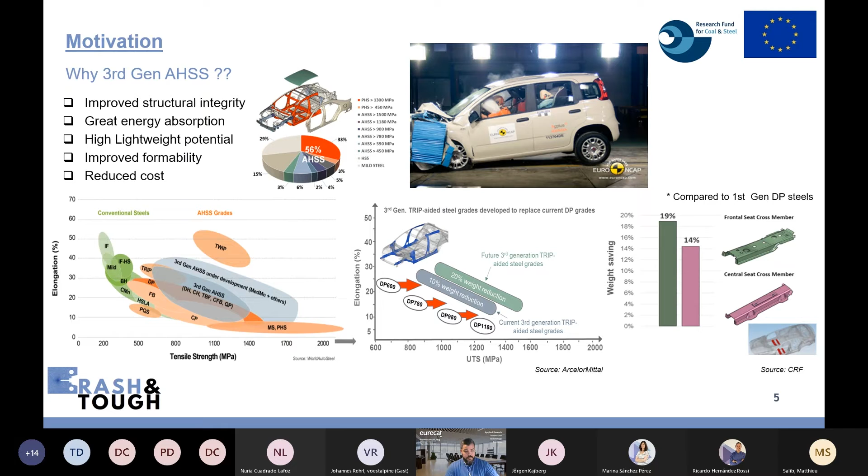Some similar information from another source - this is data provided by CRF, which they shared with us for the project. Again replacing first generation dual phase steels with third generation TRIP-assisted steels in different components, they obtain weight savings from 14 to 19%, which again are important savings, while maintaining or even improving the safety performance of these components.

Let's see what are the objectives of the project and also the main outcome. The main aim of this Crash&Tough project is to develop high crash resistant steel solutions based on third generation advanced high strength steels. We do this mainly through the investigation of the effect of microstructural constituents on crack initiation and propagation resistance, in order to optimize their microstructure for high fracture and high crash performance.

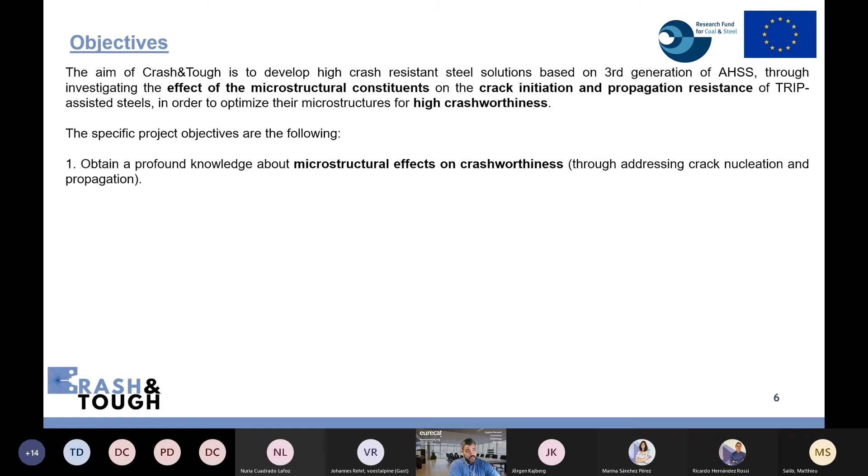The specific project objectives are listed as follows. The first is to obtain a profound knowledge about the microstructural effects on fracture resistance and crashworthiness. Second is to characterize the crash behavior of different trip-assisted steel microstructures by means of small-scale laboratory tests, including V-bending tests according to VDA 238-100, also fracture toughness measurements, and larger scale semi-industrial impact resistant tests based on axial and bending impact tests.

Also, an important part of this project is the development of improved finite element models to better predict the crash behavior. This includes the development of new damage models and new failure criteria based on strain and energy-based damage models that will be implemented to improve the accuracy of these crash simulations. Finally, we also try to validate the implementation of these new steel grades in industry, in high crashworthiness automotive parts.

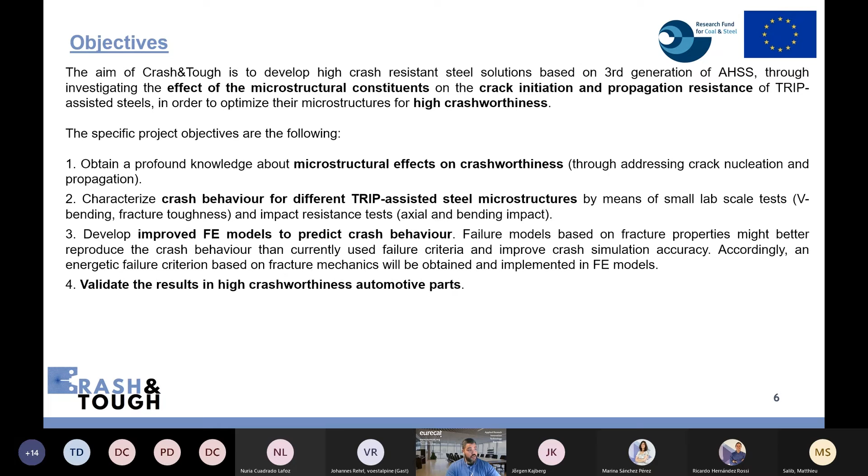Regarding the results, the main outcome of the project has ended with greater knowledge on the relation between microstructure and fracture resistance of third generation advanced high strength steels, together with new finite element models for crash simulation, which we will see later in the next presentations. We expect these achievements will also contribute to foster the development of new third generation steels or trip-assisted steel microstructures, and also the implementation of these kinds of steels in high performance and safety related automotive components.

Finally, briefly to talk about the project structure, the project has been structured into 7 different work packages, each one coordinated by one of the participants. Work package 1 was directed to the microstructural and mechanical characterization.

In work package 2, we performed a series of small-scale tests to estimate the crashworthiness of the investigated steel grades, namely bending tests and fracture toughness measurements by means of the essential work of fracture methodology. Then in work package 3, we performed more semi-industrial laboratory axial and bending impact resistant tests, also together with dynamic tensile tests at different strain rates, to characterize the dynamic response of these steel grades.

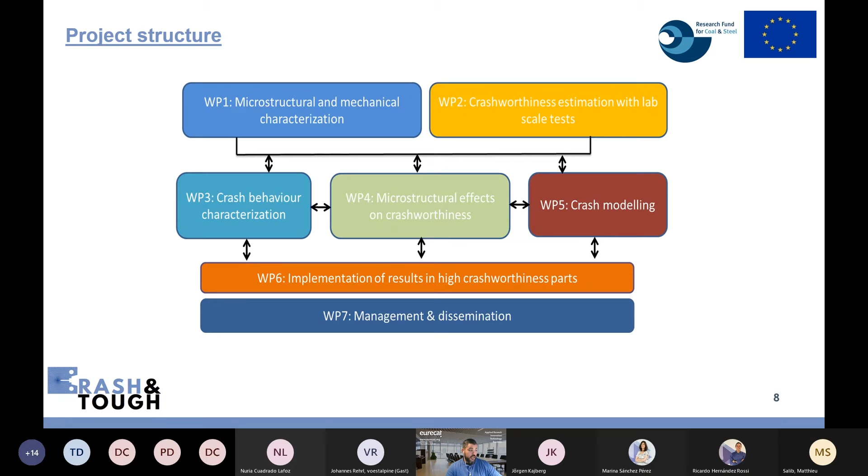In work package 5, we worked with new damage models to improve the accuracy of the simulations, developing new damage models based on strain and energy-based damage models that we will see more in detail later. All this converged in work package 6, where we implemented the results in industrial automotive parts. Work package 7 is related to management and coordination, which was led by Eurecat. I think that's everything from my side.

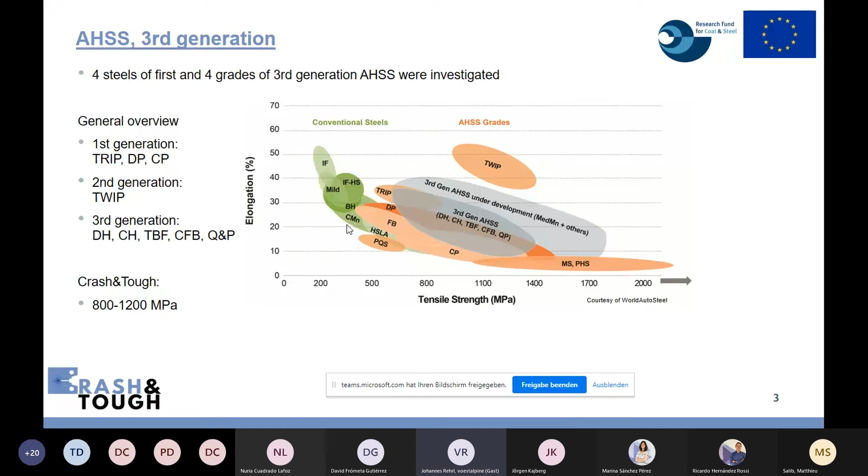Generally, we can say that the AHSS steels of the first generation show quite high strength and a balanced ductility. Typical phases in this multi-phase microstructure are soft phases like ferrite, bainite, but also harder phases, that means martensite, tempered martensite, and some retained austenite.

The grades in the third generation AHSS are multi-phase grades with an increase in global and local formability. That means these grades show high elongation values, good bending values, and improved edge cracking behavior. The grades contain retained austenite in a bainitic or martensitic matrix, including other phases, that means soft and harder phases in specific proportions and distributions to gain these enhanced properties.

The steels have retained austenite, and this retained austenite enables a trip effect. That means we have a strain-induced transformation from austenite to martensite, and this enables an increase in uniform elongation due to an improved work hardening behavior.

Here you can see a typical annealing cycle for trip-assisted bainitic grades, the TBF grades, and for carbide-free bainitic grades respectively. One very important step during the annealing process is the overaging step, that means the isothermal bainitic transformation step, where stabilization of austenite due to carbon redistribution is performed.

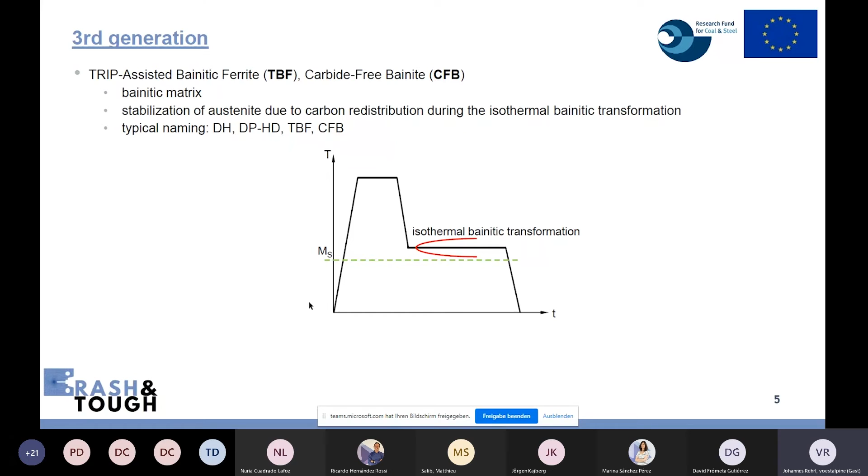Typical naming for these TBF grades, for these CFB grades, are dual phase high ductility grades, DP-HD grades, and TBF or CFB grades.

Then we have the quench and partitioning grades, the so-called Q&P, the QP grades. Here again, you can see the typical annealing cycle for these grades. We have two very important steps.

We have the quenching step, where a particular amount of martensite is generated to get the martensitic matrix for the material, and then we have the partitioning step, where again the stabilization of the austenite due to carbon redistribution from martensite to austenite is performed.

Typical naming for this Q&P grades is complex phase high ductility, or CPHD, or quench and partitioning, or QP grades.

To get this elevated local and global ductility for this third generation grades, a particular content of retained austenite and optimal stability of the retained austenite has to be achieved. So we have to say that alloying and annealing are well balanced for these grades.

For alloying, for example, we use silicon, aluminum, chromium to avoid the cementite precipitation, so to have the carbon in solid solution to stabilize the retained austenite. Then we have carbon and manganese in the steels for chemical stabilization of the retained austenite.

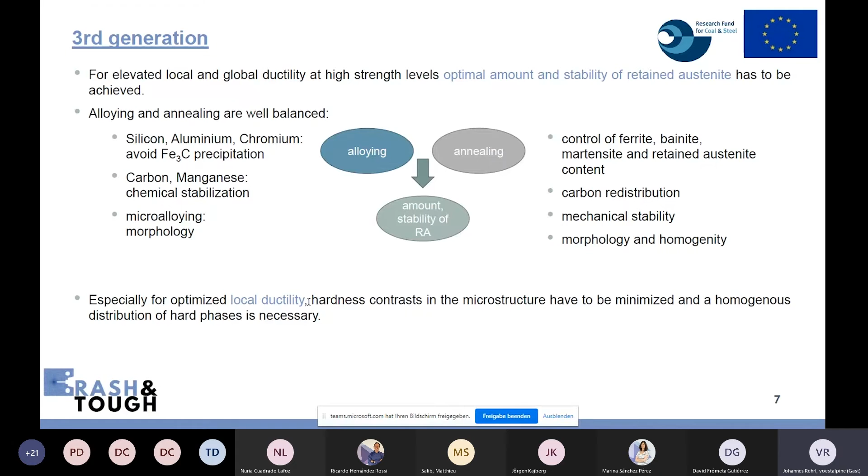The grades had different thicknesses, so please keep in mind that different thicknesses may have an impact on stiffness, on essential work of fracture, on bending strains, and energy absorption for crash tests.

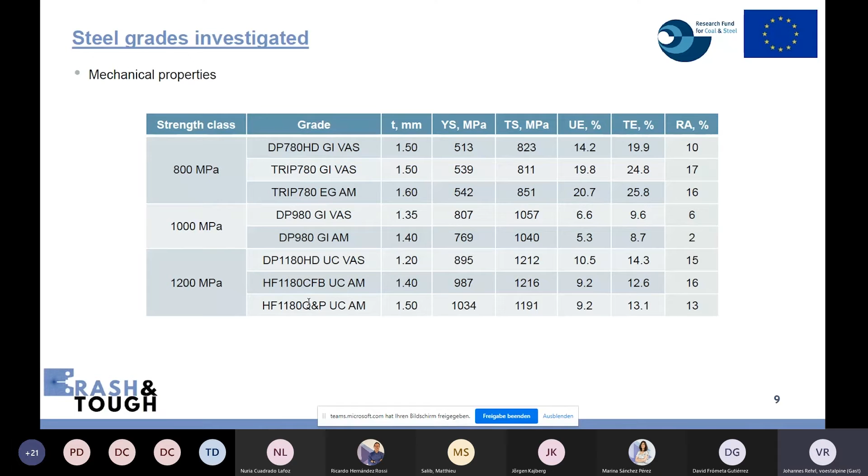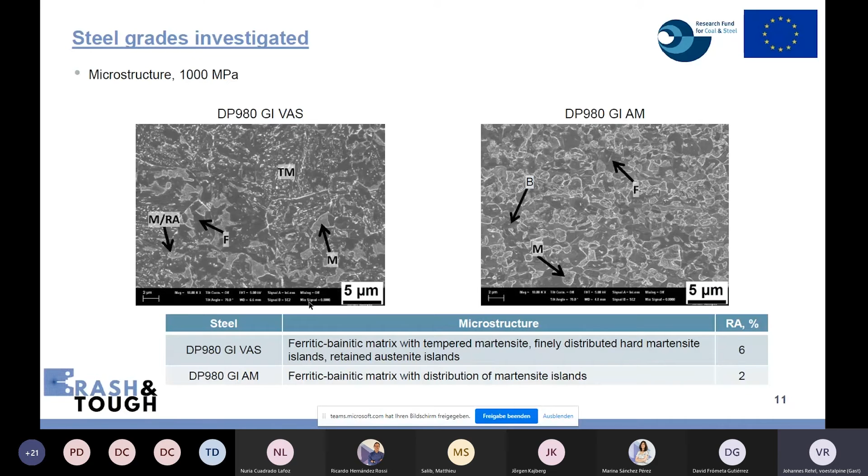On the left-hand side, you can see the dual phase grade, strength 1000 megapascal, which had some retained austenite. This is a more complex microstructure with ferrite bainitic matrix, some tempered martensite, and finely distributed hard martensite islands and some retained austenite. On the right-hand side, you can see the DP1000 grade with negligible content of retained austenite. This grade has ferritic bainitic matrix with distributions of martensite islands.

Here you can see the SEM images for the grades with 1200 megapascal strength. On the left-hand side, you can see the DP grade with low yield ratio, with lower yield strength. This grade has a bainitic matrix with globular and lamellar islands of martensite and retained austenite, and some tempered martensite is also obvious for this grade.

In the middle, you can see the DP grade with higher yield strength, with higher yield ratio. This grade has a bainitic matrix with retained austenite laths and more globular martensitic retained austenite islands. On the right-hand side, you can see the Q&P grade with high yield strength and high yield ratio. This grade consists of a matrix of tempered martensite with retained austenite laths and some bainite.

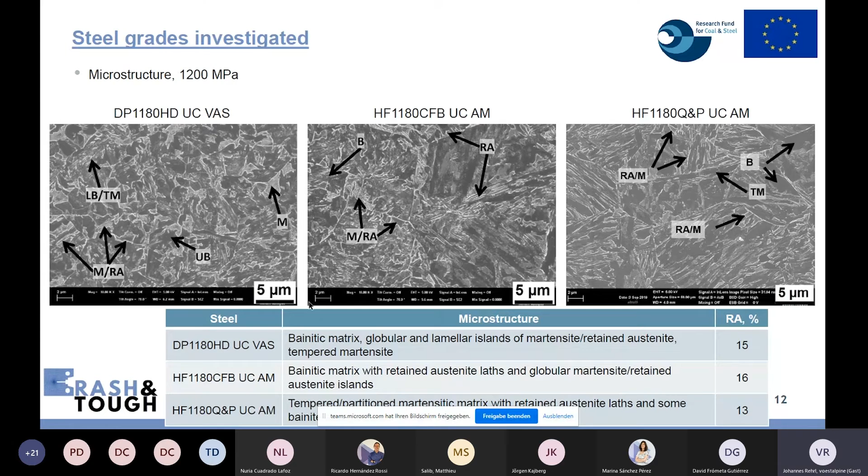We also had very high stability for the DP grade in the class 1200 megapascal with higher yield strength, as well as for the Q&P grade. Then we had a high stability of the retained austenite for the DP grade in the 800 megapascal class, and for the DP grade with low yield strength in the class 1200 megapascal.

We had a quite low stability of retained austenite for the DP grade in the class 1000 megapascal, which had about 6% retained austenite, and we had a very low stability of the retained austenite for the DP grade in the class 1000 megapascal, which had hardly any content of retained austenite. So the grades had different content of retained austenite as well as different stability of the retained austenite.

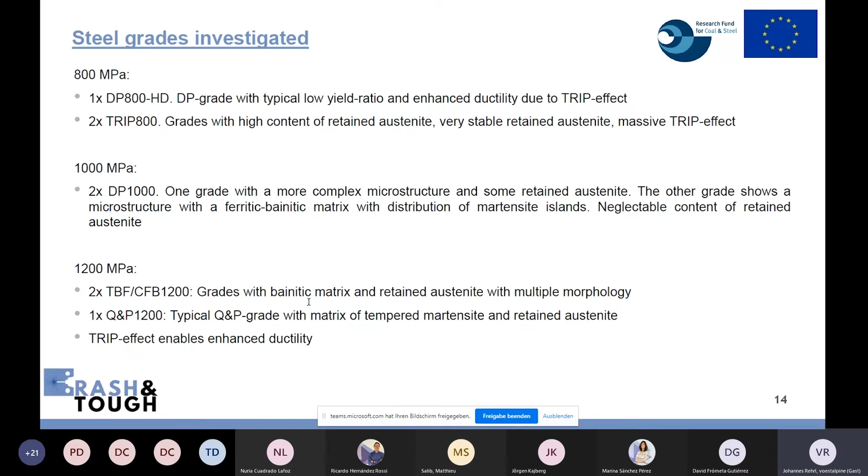And then we had the class with 1200 megapascal, where we had 2 TBF grades with different yield ratio. These grades had a bainitic matrix with retained austenite in multiple morphology. And we had 1 Q&P grade with very high yield ratio with a matrix of tempered martensite and some retained austenite. All the grades in the class of 1200 megapascal had a trip effect, which enabled the enhanced ductility.

Well, thank you for listening, and let's move on to the next presenters.

Thanks a lot, Johannes, for the presentation. Sorry for the technical problems, but okay, that's our live show problems. Don't worry, now we can continue with the presentations.

Now it's my turn again. I will talk about the fracture toughness evaluation of advanced high-strength steel sheets. Let me share my presentation.

Okay, hope everyone is seeing the presentation correctly in the presentation mode. Yes, okay, okay, thank you, Marina.

Then, well, the objective of this presentation is to talk a little bit about why we consider that it's important to measure the fracture toughness in these thin advanced high-strength steel sheets.

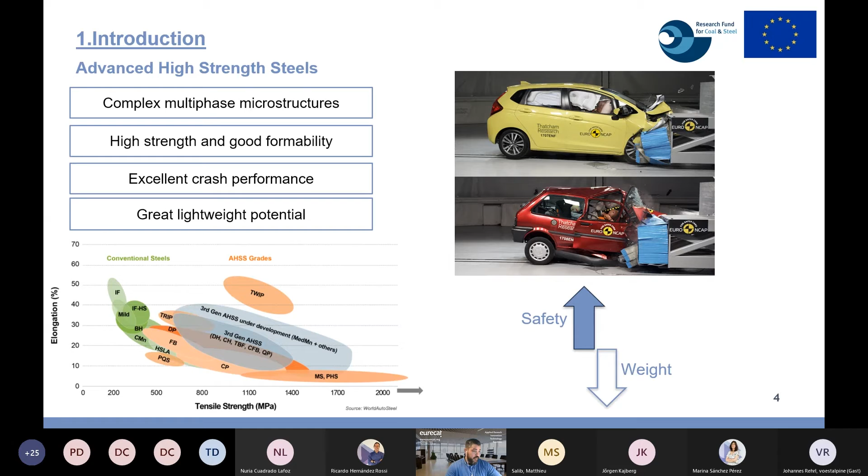Well, first, let's start with the introduction. I will not spend more time in this part. We have mentioned also in the beginning, in the first and second presentations, all the advantages of these advanced high-strength steels and how they have contributed to increase the safety and lower the total weight of vehicles. But now, not all are advantages with this kind of steel; they also have brought new challenges, especially related to these high-strength materials, related to the moderate ductility and higher cracking susceptibility, for example.

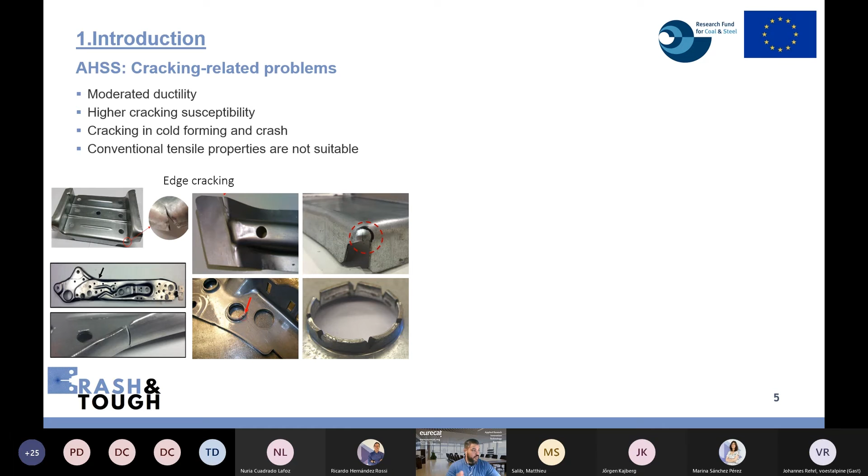Some real-life examples are, for example, the occurrence of edge cracking during cold forming, which is more and more recurrent with the use of advanced high-strength steels. So as we move to steels with higher and higher strength, it's probably more frequent.

So it is evident that we need new fracture criteria, and concepts like the fracture toughness or damage tolerance of these steels should be considered, because unfortunately the conventional tensile properties cannot define this kind of cracking behavior for this kind of steels.

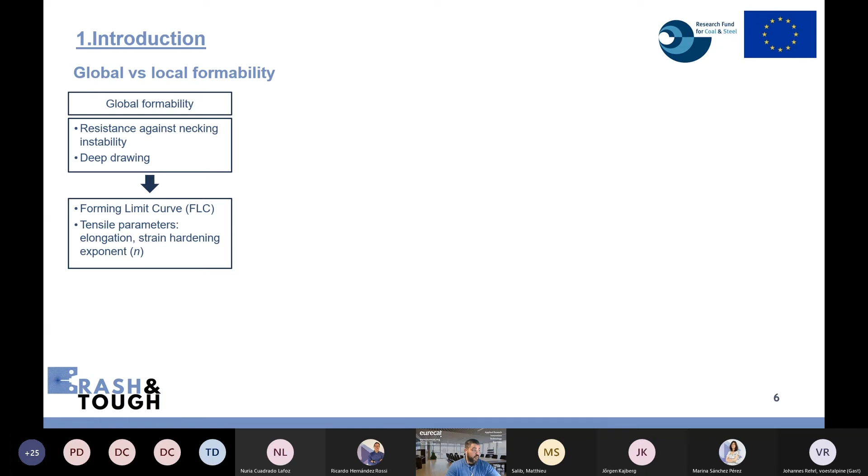That's why in advanced high-strength steels we should differentiate between global and local formability. The global formability is the traditional definition of formability, which is the resistance against necking instability, and is well represented by conventional usual forming operations like deep drawing, and also by forming limit curves or conventional tensile parameters based on the elongation through uniform strain, for example, or the strain hardening exponent.

Then, on the other hand, we have the local formability, which is more related to the fracture resistance of the material. Some examples of local formability operation modes are edge formability, or bending on tight radius, or crash folding behavior. For representing the local formability of advanced high-strength steels, different parameters have been proposed in the last year.

Like this Hance diagram, where the true uniform strain is represented as a measure of the global formability, while local formability is represented by this true fracture strain.

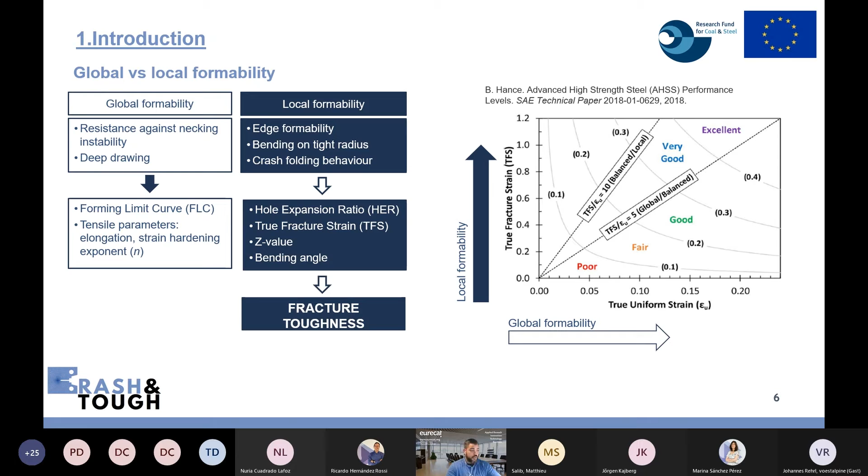Okay, now besides all these approaches, what we think in this case — if we are talking about problems related to crack initiation and propagation resistance of the material — is that we should consider the property that controls this crack initiation and propagation resistance, which is the fracture toughness. Now let's see how to measure this fracture toughness in thin ductile sheets.

One of the methodologies we have worked with in the last years is the essential work of fracture. We have seen that this is one of the most suitable methodologies to evaluate the fracture resistance or crack propagation resistance of thin metallic sheets, not only advanced high-strength steels, but also high-strength aluminum alloys and all kinds of ductile sheets.

The method is very simple compared to other fracture mechanics standard procedures, and it allows you to easily separate the specific energy for fracture from the energy related to the plastic work in fracture.

The method is quite simple. You only have to test specimens. You can use any kind of fracture mechanics test specimen, but in this case we use DENT test specimens, or double-edged notch tension specimens, because they are simpler and facilitate the test. You need specimens with different ligament lengths, which is the distance between the two cracks, and you test them up to fracture and calculate the fracture energies.

By means of simple mathematical and statistical analysis, you obtain the specific essential work of fracture, which represents the crack propagation resistance of the material, and in certain materials this could be related to the elastic-plastic fracture mechanics value, JC.

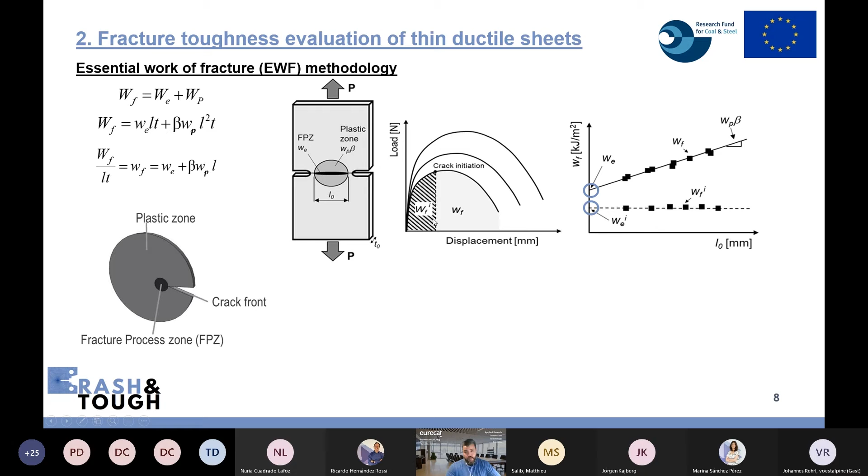One of the good points of this method is that it also allows you to easily separate the crack initiation resistance, or the energy for crack initiation, from the energy for full propagation, which is the essential work of fracture. This is a very simple method, extensively used for characterizing the tearing resistance of ductile polymer films.

There's no need for crack monitoring, so you don't have to measure the crack during the test, which is one of the greatest advantages of this fracture mechanics test.

As we will see in the next slide, this has become of great industrial interest, because we have shown in the last year that it's very useful to understand the overall fracture performance of high-strength metal sheets and problems like edge cracking or cracking under impact loading.

Now let's see how to apply these essential work of fracture measurements to understand the fracture performance of advanced high-strength steels. First, take a look at the edge cracking resistance. We know that this is usually quantified by means of the hole expansion test and the hole expansion ratio, which is a measure of the stretch flangeability of the steels.

It's a well-established, simple method, but the reliability of these tests is often put into question because there is large variability. It's not a material property, and it depends on many variables, like the punch-to-die clearance, the alignment of the tool, the operator, the system used for crack initiation and detection, and so on. That's why researchers have dedicated a lot of effort to finding mechanical properties that can define this stretch flangeability in a more objective way.

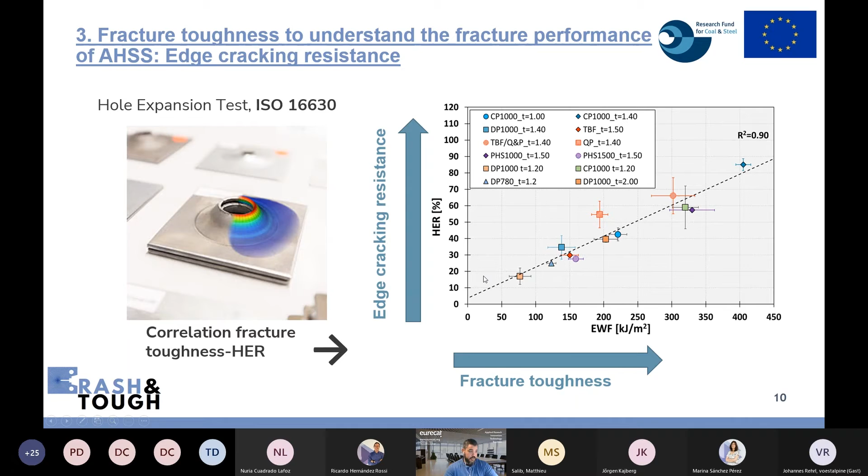Something similar occurred when we looked at the crash behavior in a previous project. The crash behavior in axial impact tests, also for several advanced high-strength steels, was quantified using a cracking index and the energy absorbed at maximum intrusion. We observed that steels with higher fracture toughness generally showed better crash behavior.

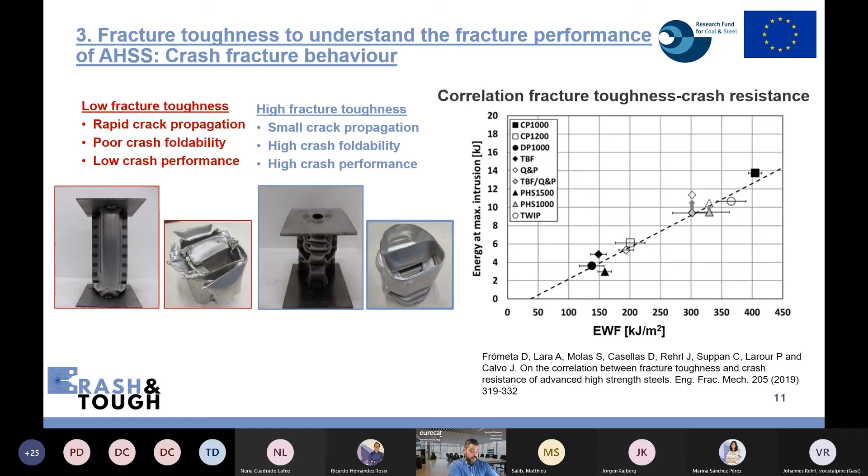What we observed from the tests is that materials with low fracture toughness showed rapid crack propagation, poor crash foldability, and overall lower crash performance. On the other hand, steels with high fracture toughness showed small crack propagation, high crash foldability, and higher crash performance.

Based on this, and seeing that fracture toughness can give important information about the fracture behavior of the material, in one of our latest papers—also developed during the execution of this project—we propose new classification maps, accounting not only for global formability, but also for the cracking resistance measured by the specific essential work of fracture.

Alternatively to the traditional banana plot, when total elongation is plotted against ultimate tensile strength, we propose also considering the specific essential work of fracture to better classify and have a more comprehensive description of the overall fracture performance.

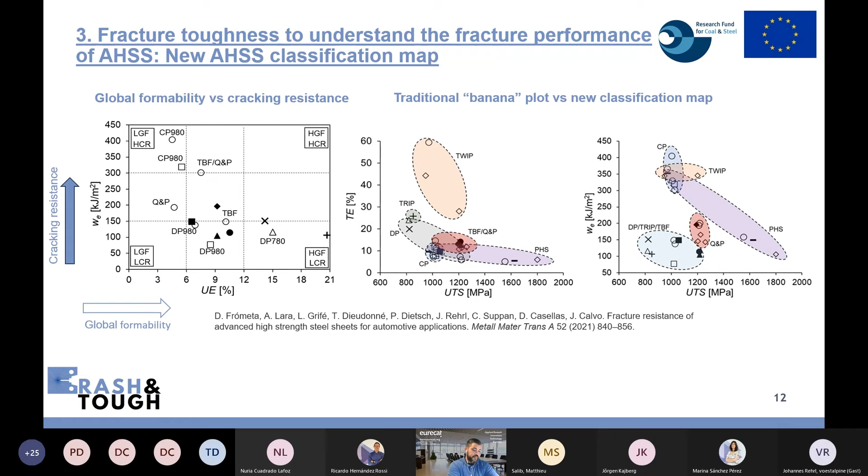Now let's see some of the essential work of fracture results we obtained for the materials investigated in this project, including the materials Johannes presented previously. These are grouped by strength class: 780 megapascals, 980, and 1180 megapascal steels.

One of the first things we can see represented are the values of specific essential work of fracture, the gray bars, and on the other hand the crack initiation resistance values, in blue. While some materials show a small contribution from total crack propagation resistance after initiation, because initiation and the full energy for propagation are quite similar.

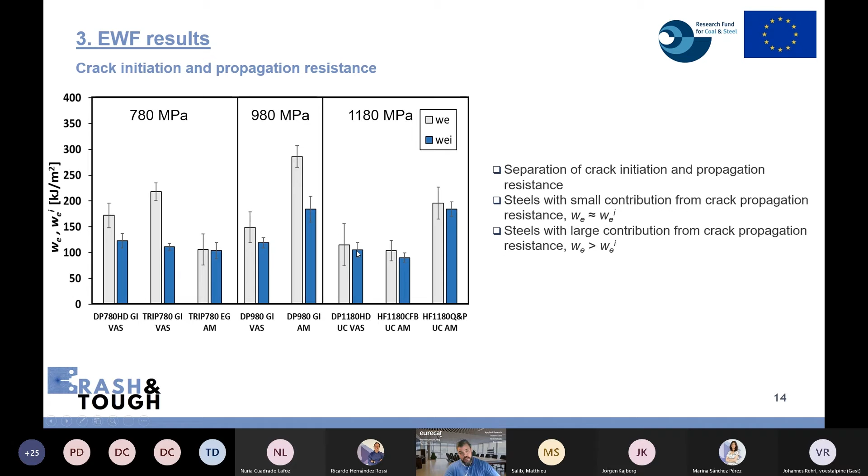But we can see in others, like the DP 980 AM or the TRIP 780 from voestalpine, that this contribution after crack initiation, this energetic contribution to crack propagation resistance, is very high. So a single parameter for crack initiation is not sufficient to define overall fracture performance.

Another important message we wanted to repeat is that crack propagation properties, crack propagation resistance, cannot be estimated from tensile properties.

The traditional way of thinking is that materials with higher elongation or higher strain hardening should show greater fracture toughness. This is not true. In advanced high-strength steels, often the trend is the opposite, so steels with higher elongation can show lower crack propagation resistance.

So it's important to highlight that fracture toughness cannot be estimated from tensile properties, and it should be properly measured within the framework of fracture mechanics.

As an exercise, we wanted to put all the values of essential work of fracture into the classification map shown in the previous slide. We can see where they fit, with the 780 grades, DP and TRIP, more or less in the same group of similar steel grades.

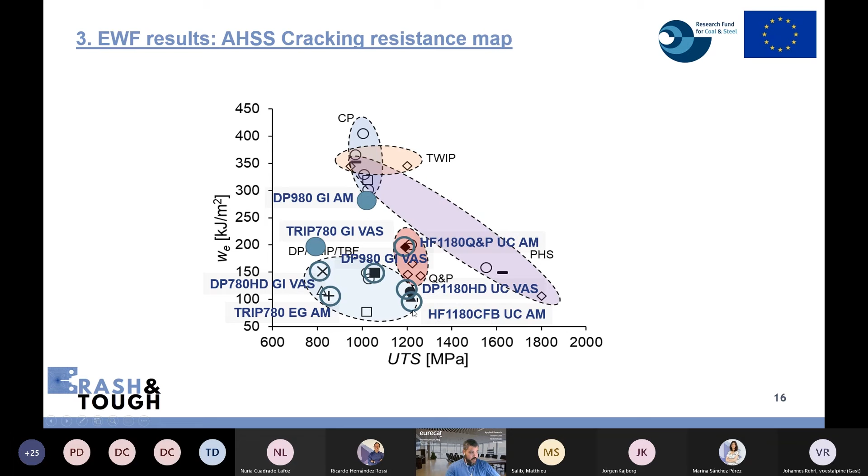Finally, regarding the 1180 grades, we can see the QP steel is also in the group of Q&P steels, showing good agreement with other Q&P steels investigated in other projects, as well as the DP 1180 and HF 1180 CFB, which are also in agreement with the classification proposed.

Finally, we have seen the importance of measuring fracture toughness, and why it is important, and it will become more relevant as we develop new steel grades with improved properties and complex multi-phase microstructures. Now I want to explain some of the measures we are taking to foster industrial implementation of this fracture toughness measurement.

The first is regarding standardization, because there's no standard method yet for this essential work of fracture methodology. There's a testing protocol developed by the European Structural Integrity Society, intended for fracture characterization of polymers. In another European project called Formplanet, we developed a CEN workshop agreement called the test method for determination of the essential work of fracture of thin ductile metallic sheets.

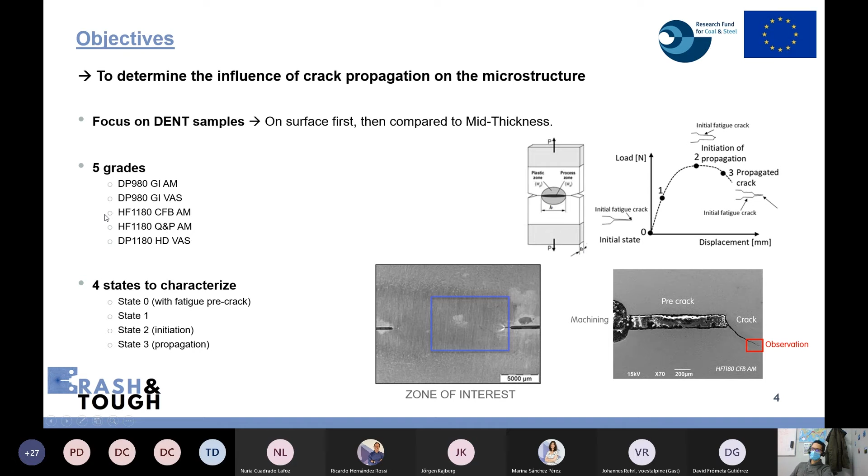We observed this evolution on 5 grades: the 2 DP980, the 2 HF1180, and the DP1180 HD.

So the EBSD technique - why use EBSD? First, to observe and quantify the microstructure. We're able to detect the type of microstructure, and we can quantify the fresh martensite. We can also quantify the grain size, both average and distribution. For martensite microstructure, we can identify the micro-constituent size and location of the crack through the interfaces of the martensite.

Secondly, we can observe the evolution of deformation induced by the crack - we can localize the deformation zone in direct link with the crack propagation. We can quantify the density of GND dislocations, and we can also see the evolution of the constitutive phases, only if the size is enough for characterization by EBSD. Below 300 nanometers, it becomes difficult to clearly quantify the phase presence.

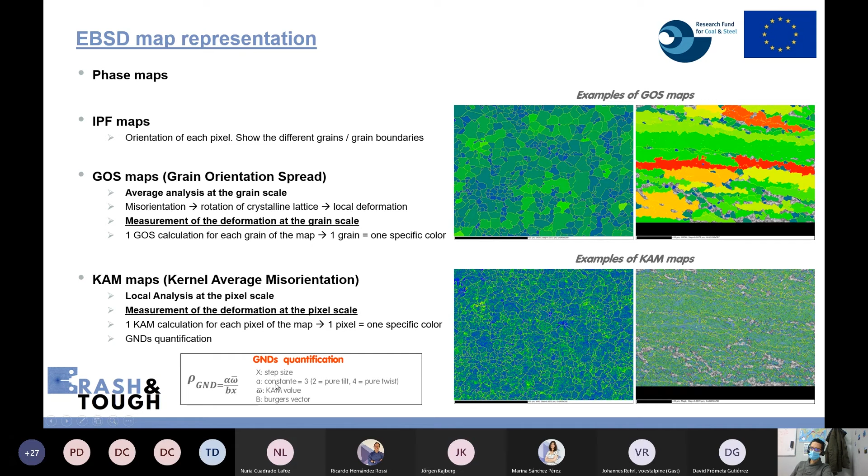Finally, the KAM maps, which means kernel average misorientation. Here we look at the local misorientation at the pixel size, and the same hypothesis applies locally: if we have some misorientation, we can say that we have some local deformation. Here one color equals one pixel. Through the KAM maps, we are also able to quantify the GND, the geometrically necessary dislocations, through this formula, which consists of the step size, a constant, the KAM value, and the Burger's vector.

Okay, so the main results: the evolution of the retained austenite. At each step, I only show the maps which come from the HF1180 CFB, and after, I will show you the quantified values.

This shows that EBSD is not the most suitable technique to characterize the austenite, because it is too thin. So what we say here is that the deformation induced by the crack has transformed the austenite into martensite by TRIP effect. We can confirm this by comparison.

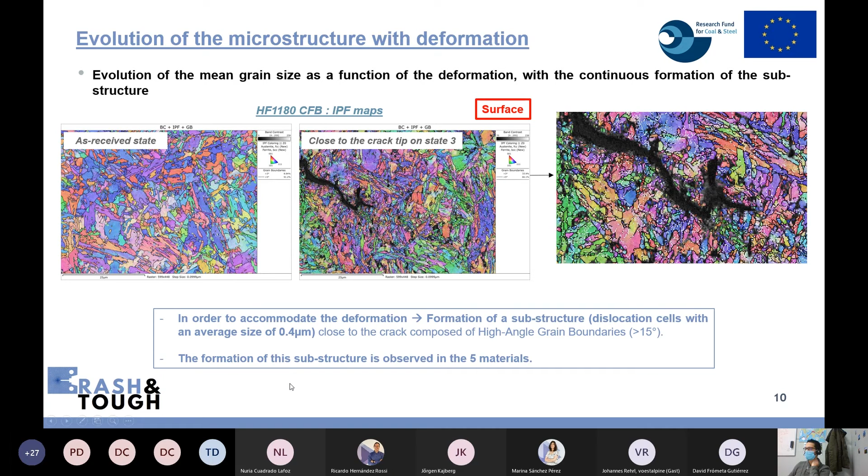So we have formation of a substructure with dislocation cells of an average of 0.4 micrometers, and this formation of the substructure is observed in the 5 materials.

Yes, and at stage 3, the average effective grain size decreased drastically by 2 times. So this is a real evolution. We have seen in the literature that this kind of substructure was already observed by TEM, and that the dislocation cells were around 0.5 micrometers, close to what we have seen.

Now with the GOS maps, we can see the evolution of the deformation. Again this is the HF1180 CFB, far from the crack and close to the crack, at state 3, or we can say state 0 and state 3.

What we can see when we zoom on state 3 is the presence of this substructure, and that these dislocation cells are dislocation free, separated by high angle grain boundaries. Inside the cells, there is no dislocation, no misorientation. This is also observed in the 5 materials.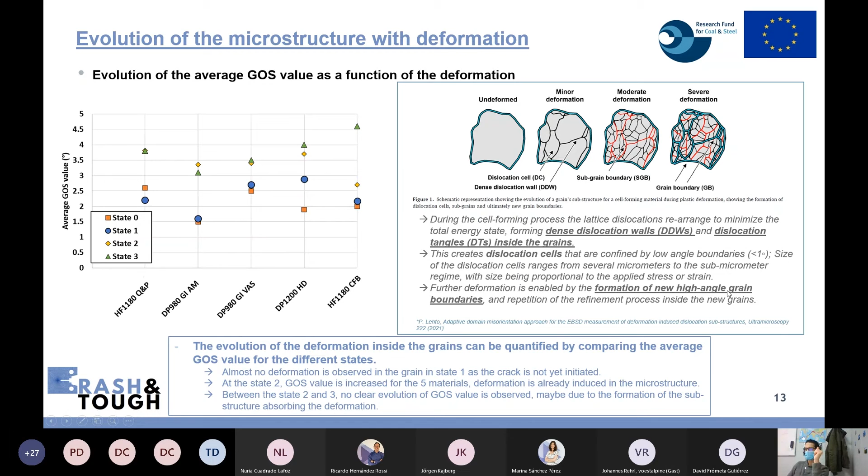We have also seen in the literature the formation of the substructure, which is composed of dense walls or grain boundaries. So we can compare that to the formation of new high angle grain boundaries, and this is what we can see on this GOS map here.

And finally, the evolution of the deformation at the local level, locally, yes.

So we can see through the KAM maps that between the zone far from the crack and close to the crack, all the surface analyzed by EBSD here is impacted by the deformation, and that close to the crack there is also more deformation. So we can say that all the phases are impacted by the deformation. So this is a fact.

And in stage 3, the global KAM value is higher, linked with the deformation. It seems that locally, close to the crack, the deformation is no higher than far from the crack. So we can see that here and here there is no difference in terms of KAM, so no real difference in terms of deformation.

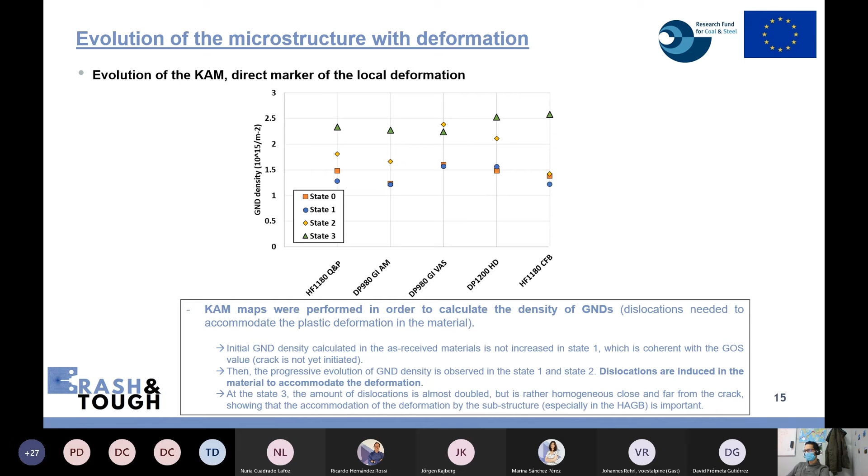And we can say that at stage 3, we have double the number of dislocations. So this is all. And just to say that we have the same results at the surface and at mid thickness. So we can say that all the observations that we have made on the surface are the same in the whole volume.

Okay, this is all, and the conclusion is only what I was saying. So I think I have nothing to add. Okay, thank you.

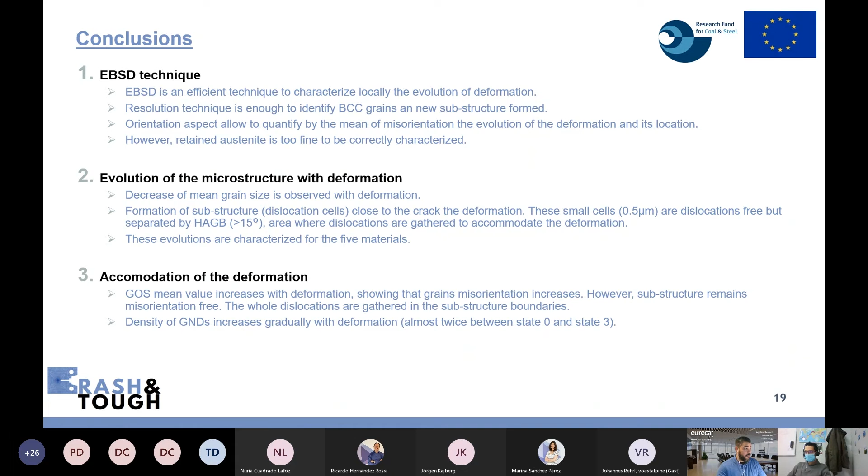Thanks a lot, Mathieu. Sorry for interrupting. I also, well, we are 5 minutes behind the schedule also. Well, yes, so my fault. Okay, maybe we can recover some minutes after in the Q&A session.

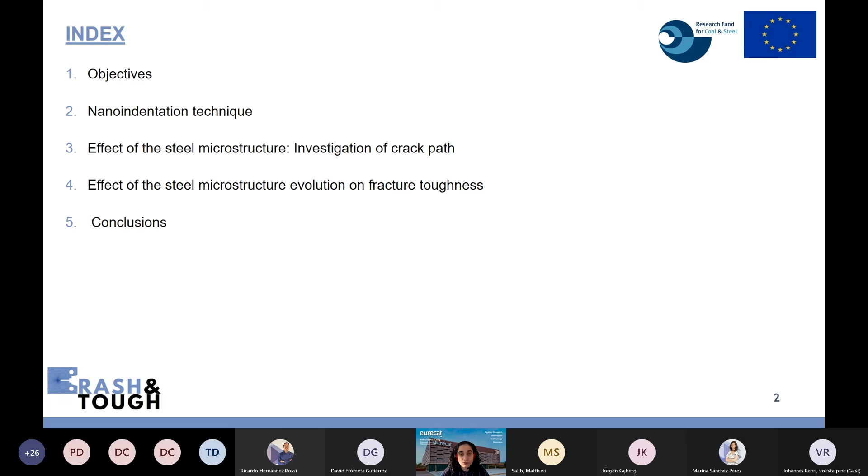The main objective of this study is to understand the role of each microstructural constituent on fracture toughness. Each microstructural constituent will have an effect on crack nucleation and propagation resistance. And we relate this crack nucleation and propagation resistance with the macromechanical evolution of the propagation.

We use specimens of essential work of fracture, where fracture toughness is being evaluated. And in the same way as in EBSD, we have done the micromechanical evaluation at stage 2, that is the initiation of propagation, and at stage 3, that is before fracture, where the crack is propagated.

So, nano indentation technique, here we have a video. It's an instrumented technique that continuously controls and monitors the loads and displacements of an indenter as it is driven into a material. We can obtain the load and displacement curve, and with that curve and mechanical contact, we can compute hardness and elastic modulus mostly.

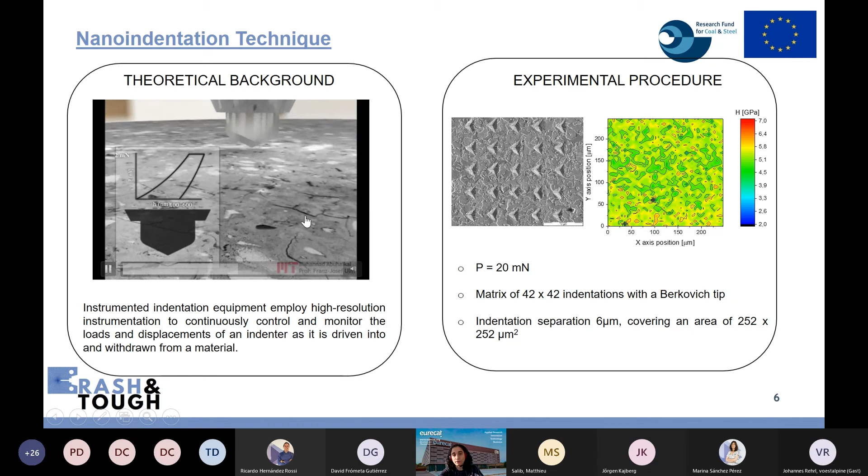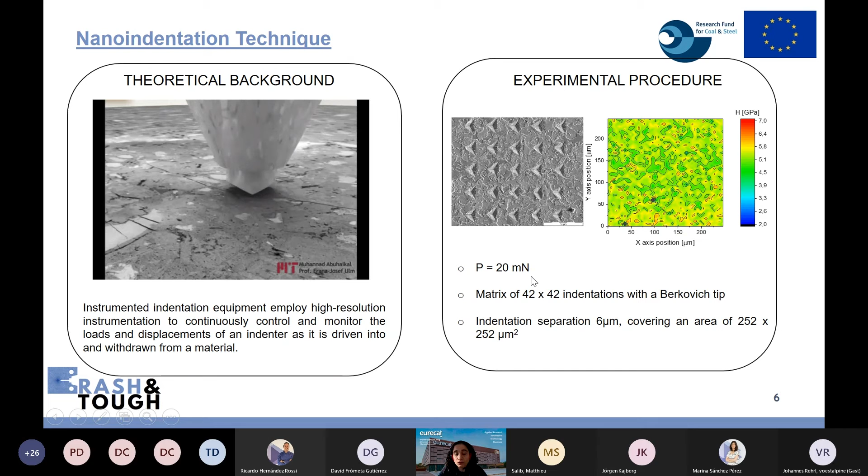We have done an array of 42 by 42 indentations, so we have a matrix done in the steels covering an area of about 200 microns. And we can obtain with this technique a mapping of hardness, so we can see the distribution of hardness, and this can be related with the microstructure.

So let's move on and talk about the effect of the steel microstructure on the crack path and on the fracture toughness.

So in this study, we are going to compare the first generation steel grade, this dual phase 980, that doesn't have retained austenite, and we are going to compare this microstructure and their fracture behavior with the third generation steel grades.

Very briefly, because the microstructure has been explained before: DP, this dual phase, consists basically of ferrite, bainite, and globular martensite. And it's important to note the lack of retained austenite in this grade of steel.

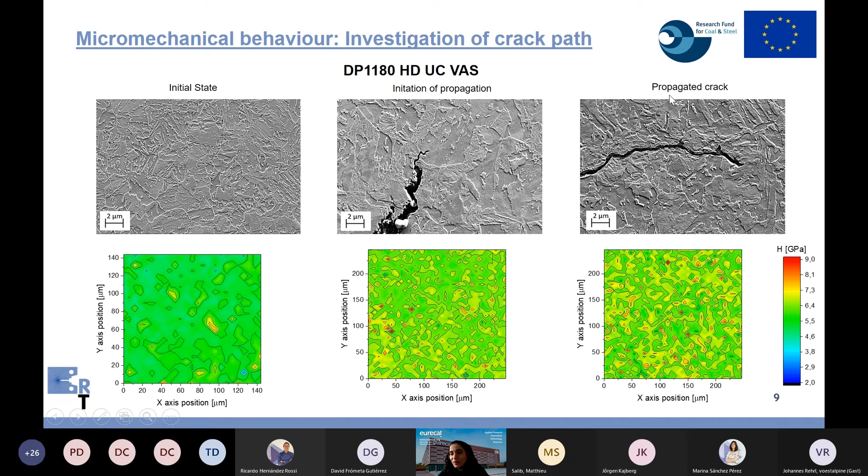We can observe that these little islands increase in stage 3, where the crack is propagated.

Finally, here we can observe the QP, which consists basically of tempered martensite. In that case, the pronounced needle-like morphology of retained austenite islands is a clear difference with the other steel grades studied in this project.

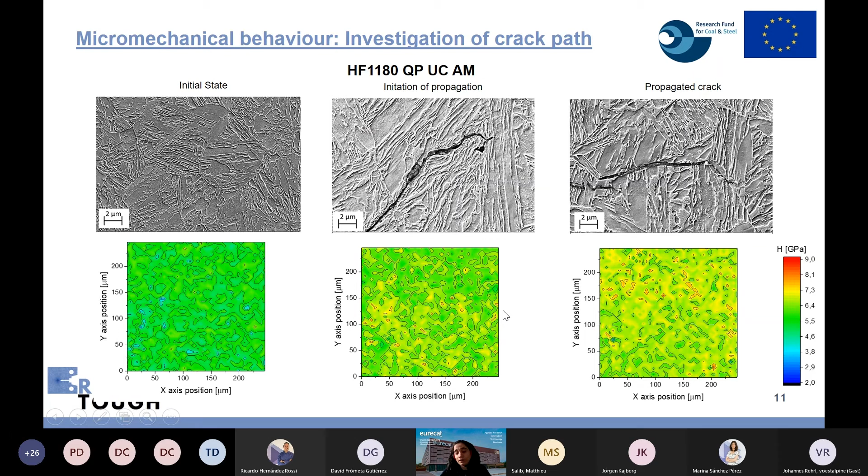So how do these mappings and microstructural effects relate to fracture toughness, directly from the mappings? From the hardness mappings we can extract a histogram and analyze in an approximate manner the hardness of each microstructural constituent present in the microstructure. Here we have all four steels, and we can observe that if we decrease the hardness difference between the phases, the crack formation is delayed.

If we compare the fracture toughness at crack initiation, these results are from essential work of fracture. We can observe that if the hardness difference of the microstructural constituents is smaller, this fracture toughness increases. So the best results are for DP, the first generation dual phase steel grade, and for QP, because the difference between the microconstituents is smaller.

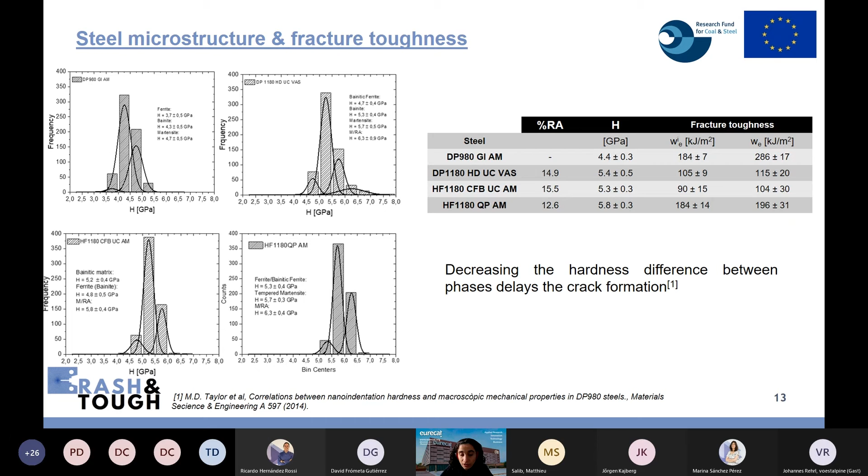This is because decreasing the hardness differences facilitates enhanced local formability.

If we study the crack propagation for the first generation grade steel, the dual phase 980, we can observe that the crack propagates along the soft ferrite phase, linking the hard martensite islands. It's like a network where all these small, isolated martensite islands are connected through the propagation of the crack along the soft ferrite phase.

If we study the crack propagation on third generation steel grades, we can separate the steels into two blocks. On one hand, we have the dual phase 1180, in the same way as the previous dual phase: crack propagation is along the bainitic matrix, following and connecting the martensite islands present in the microstructure.

On the other hand, we have the CFB and QP steels that have little differences related with crack propagation. In CFB, we can observe that the crack propagates along the arrangement of the bainite laths. In the case of QP, the crack propagates along the grain boundaries, through the interfaces between the blocky retained austenite and the tempered martensite matrix.

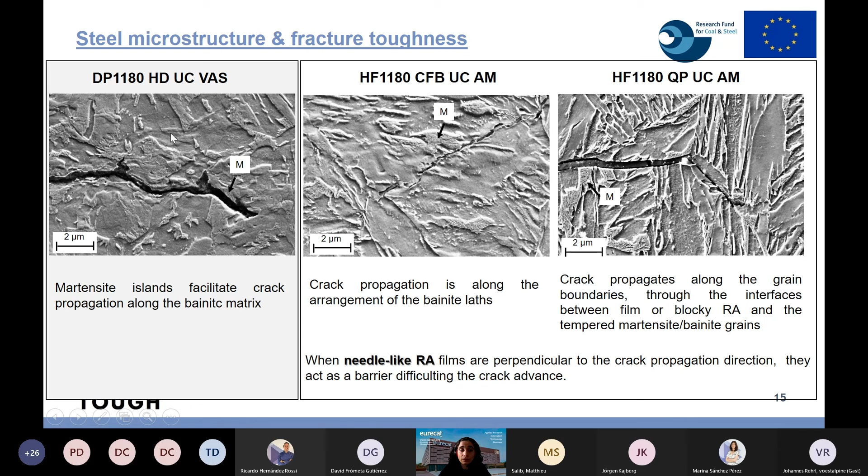Finally, if we check the properties, we can see that the TRIP effect improves global ductility. This is the main result of the project. So TRIP effect improves global ductility, but may have a detrimental effect on fracture toughness, as we can see from the fracture toughness values. But an optimum balance between global ductility and crack propagation resistance can be achieved through microstructural tailoring. This means we can design the microstructure of the steel, taking into account the microstructural effects, and in this manner improve the fracture toughness of the material.

So to conclude, the main conclusions are: the nanoindentation technique is an easy and fast way to evaluate the effect of the microstructural constituents on crack initiation and propagation. Crack propagation resistance can be improved through microstructural tailoring. The main conclusion on initiation is that decreasing the hardness differences between phases delays crack formation because local formability is improved.

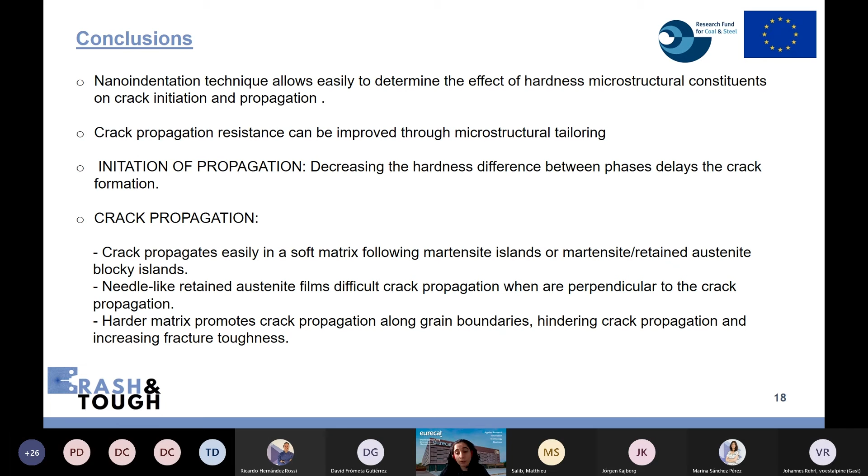About crack propagation: cracks propagate easily in a soft matrix following martensite islands, connecting these martensite islands. Retained austenite films make crack propagation difficult when perpendicular to the crack propagation, while a harder matrix promotes crack propagation along grain boundaries, hindering crack propagation and increasing fracture toughness. So that's all.

I've been fast, maybe. Thank you, Maria, for the interesting presentation as well. Well, now we have some time for your questions.

I haven't seen too many questions, so I have one from the beginning of the session, made by Bundan Kumar Singh. Maybe it's directed to the first speaker, Johannes: is the TRIP effect taking place during stamping? Is it rate sensitive, since it's better used during crash rather than forming?

Well, of course, the TRIP effect takes place during forming, and it also depends on the strain rate. Yes.

Also during the project we have seen that this TRIP effect depends on the forming steps, also on the strain, on the deformation path. We also investigated how this transformation of retained austenite to martensite evolves. I would say it depends on the stress and strain state, and especially also on the strain rate.

Okay, thank you. I don't know if that answers your question. I also cannot see more questions, so I don't know if everything is clear. Maybe you need more time after to digest all the information, and maybe you'll have more questions or doubts or comments. Of course, you can come to us.

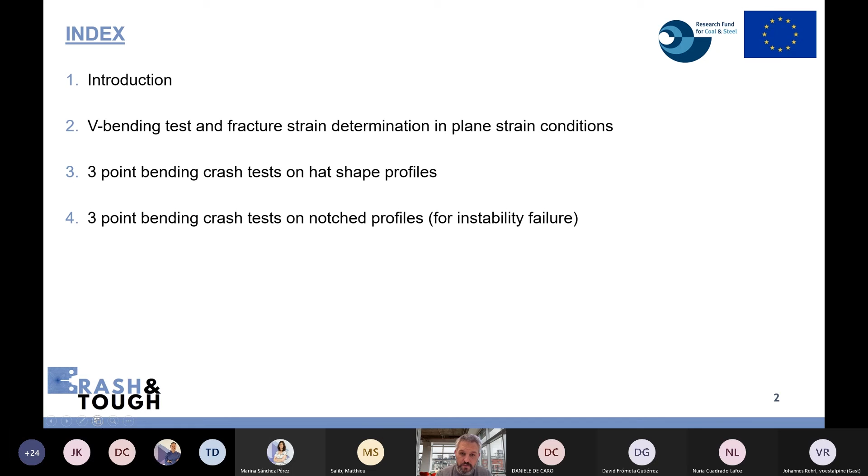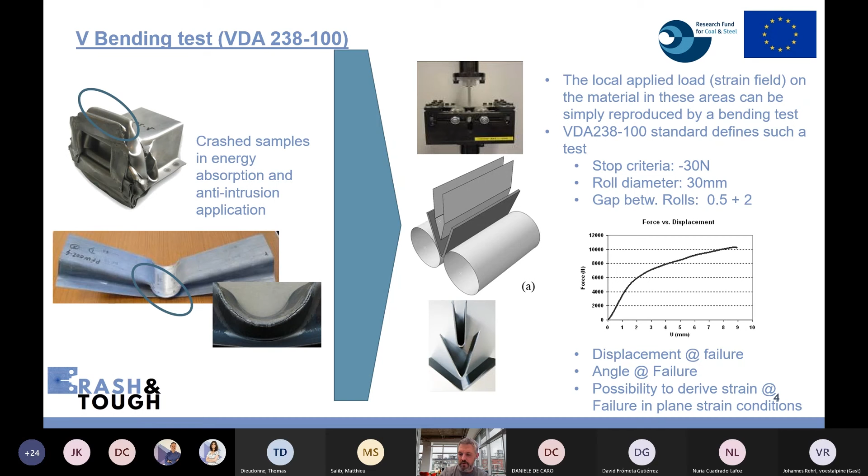So how do we extract the fracture strain thanks to this result? On the left side, first we perform the experimental test. We measure the force versus the displacement, and take the displacement at failure, detected by the load drop. We take the value just before the load drop, the maximal force, and inject this displacement into a finite element simulation, which takes into account a fine plasticity description of the material, the correct setup, the correct thickness, the correct gap, and we virtually measure the fracture strain on the sample, which is the strain reached when the displacement at failure is reached experimentally. Then we have the fracture strain.

This approach was applied on 6 steel grades: the TRIP 800 from voestalpine, DP 980 from both steel makers, and 1180 grades also from both steel makers. We will have some comparison of these results.

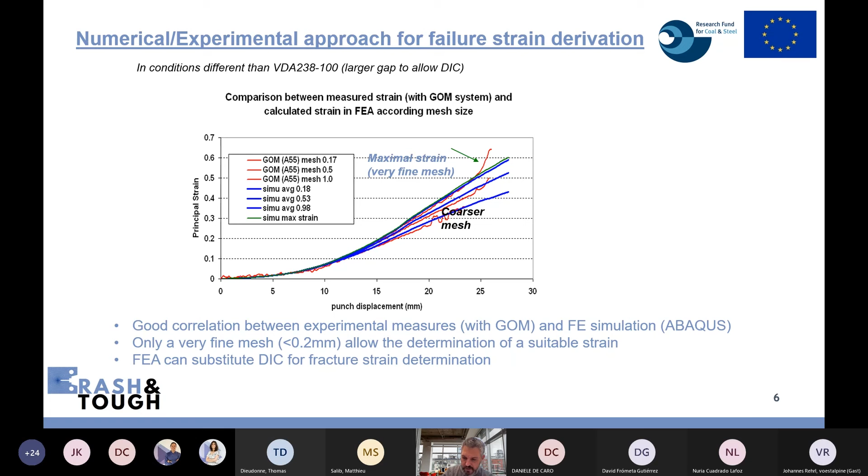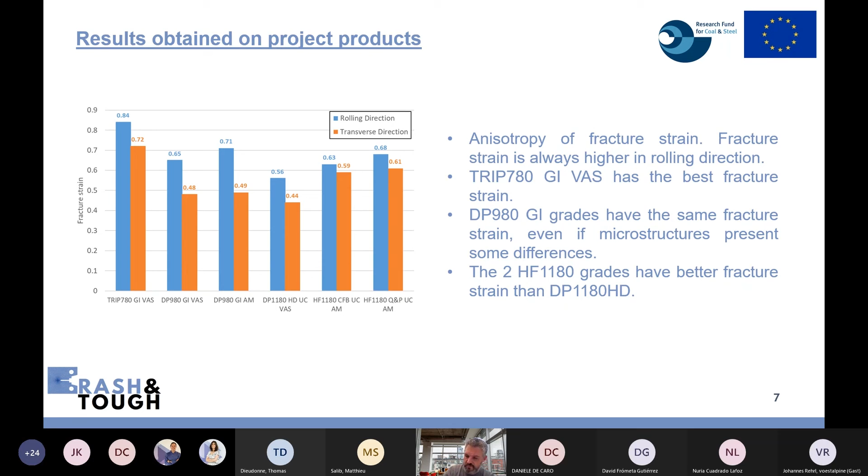So here what we can see is that first, all products have a big anisotropy of fracture. Generally, the fracture strain is always higher in the rolling direction. We can also see that the best ductility is reached for the TRIP 800 product. Secondly, the both DP980 grades have the same ductility, more or less equivalent in both directions. Finally, regarding the HF grades, they have very satisfying ductility, a little bit higher than the DP-HD grade. So that's for the classification of the product in terms of local ductility.

Unfortunately, or by chance, or fortunately - depending on how you want to look at the result - no failure was observed on any material. It means this test was not severe enough. Here we have the results: the general view of the crushed sample, and locally, when we look at the bent area, there is no failure. So unfortunately, this test is not able to differentiate the products in terms of ductility, and it is not severe enough to validate the failure criteria developed by the partners of this project.

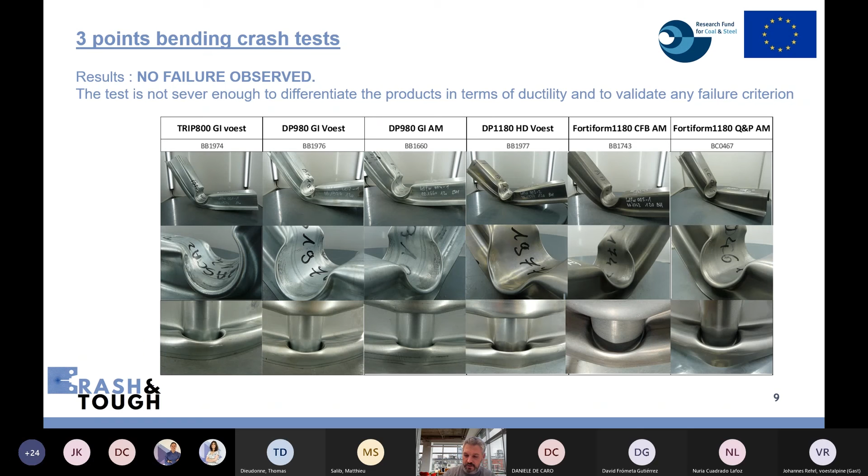However, we can measure the force versus displacement curve, and all this data was transmitted and shared with the partners. They were able to validate at least the behavior of the material, even if it was not possible to validate some fracture criteria.

That's why we wanted to modify the sample. We just machined a notch, which we can see on the drawings, in order to make a weak point on the section and to reach some failure. In these very severe conditions, all the samples failed.

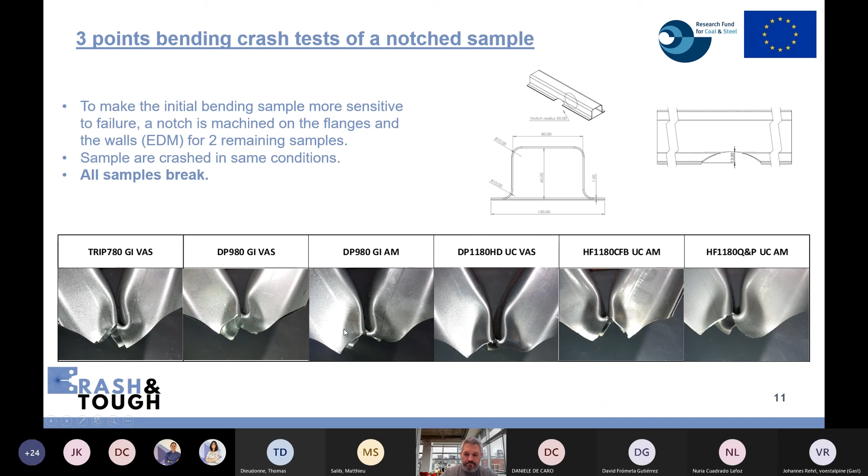We can see that the displacement is in high excess, and the sample should have failed quite early. We can see that on the next slide, because during this test we also measure the force versus displacement curves.

And that's all. Thank you very much.

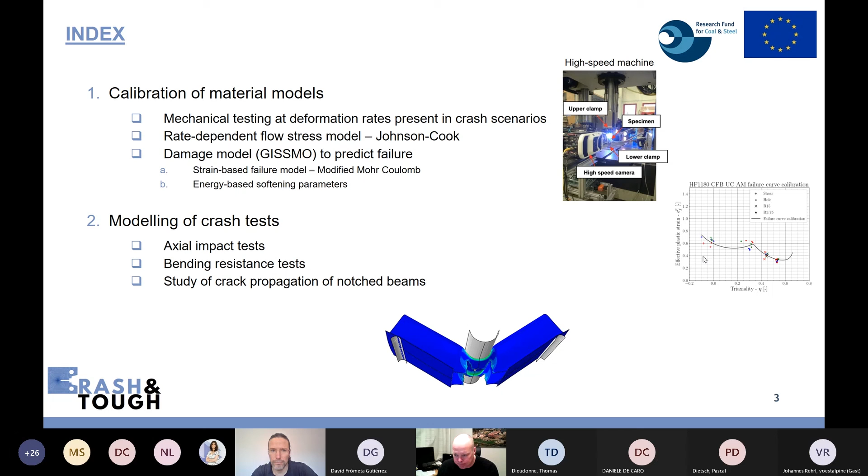First of all, crash situations involve both very large deformation and also quite high strain rates. So it's obvious we need some kind of testing in a range of strain rates, from static to the order of hundreds. Therefore, we have used the high-speed tensile test machine here at LTU.

We have also applied the method developed during the last years, called the stepwise modeling method. It's a quite quick method to get the flow stress behavior from initial yielding beyond necking and all the way to failure, so you don't have to extrapolate any data. You get the entire curve, and you also get the failure strain.

This method is based on the use of digital image correlation. You can see here some four examples, and we're using different kinds of geometries of these specimens. You have a shear specimen, one with a hole to get plane stress, and a notch to get the very important plane strain condition that Pascal mentioned in the previous presentation.

As an output, besides having the flow stress curve, you also get the triaxiality history from where plastic deformation starts to the final fracture, for all different specimen geometries, which is correlated to different triaxialities. This is, of course, used to calibrate the failure model, in this case the modified Mohr-Coulomb.

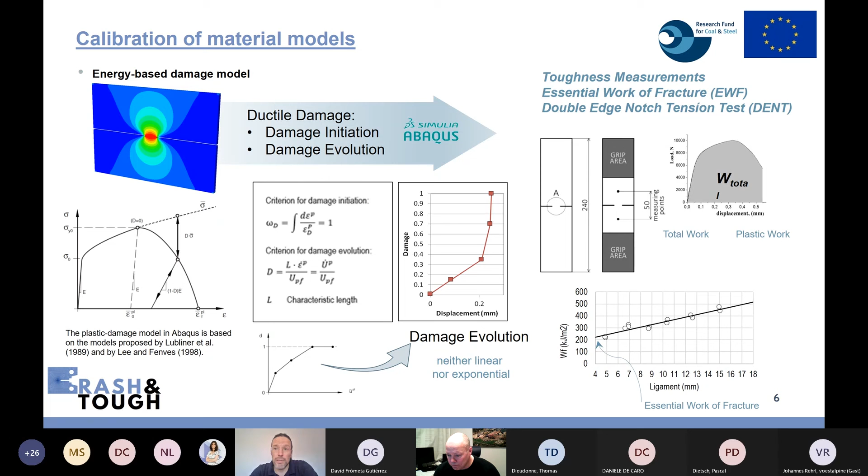The important thing here is that we calibrate the model using the DENT test, the double-edge notch tension test explained by David in the first session, and we follow the methodology for obtaining the toughness by the essential work of fracture.

Through the simulation of this test, we obtain the parameters of the failure model. You can see on the right the damage evolution curve, in this case defined in a multilinear way, and we use an inverse engineering process, like Jorgen explained before, changing the model parameters to obtain a good fit between the simulation and the real test in terms of the force-displacement results.

And we do this for different ligament lengths. In our model we work with shell elements, and the failure model was calibrated for 1 millimeter element length.

Until now this is a fully empirical approach, but from our latest investigation we are finding some relation between the damage parameter and the thickness strain. I hope this will allow us to find a physical explanation for this model, and of course we are working on it.

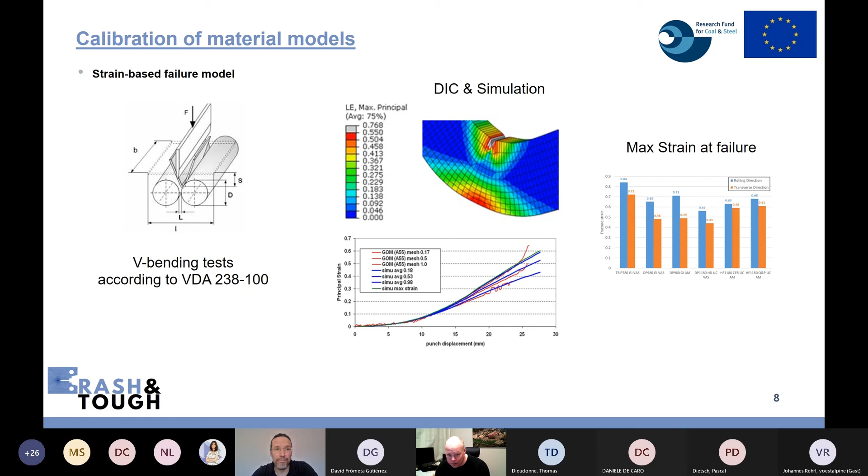So the next step is modeling, and also validation of the simulations we have performed. First we have axial impact tests performed by voestalpine, and we have run similar tests at LTU, but in this case we added 2 high-speed cameras and also put speckles on the crash boxes, in order to measure the deformation during compression. We also measure load versus intrusion, but in this case we could also detect when potential cracks occur and how they propagate.

Then we have the bending tests shown by Pascal. LTU has been running the bending test without a notch, and Ricardo will show the one with a notched beam.

At LTU, in our case we use LS-DYNA. Once again, we have a Johnson-Cook rate-dependent flow stress model. We have a modified Mohr-Coulomb failure model. We have this GISSMO damage model, and the element will be eroded when damage at the central integration point reaches unity. We have used fully integrated shell elements of size 1 millimeter.

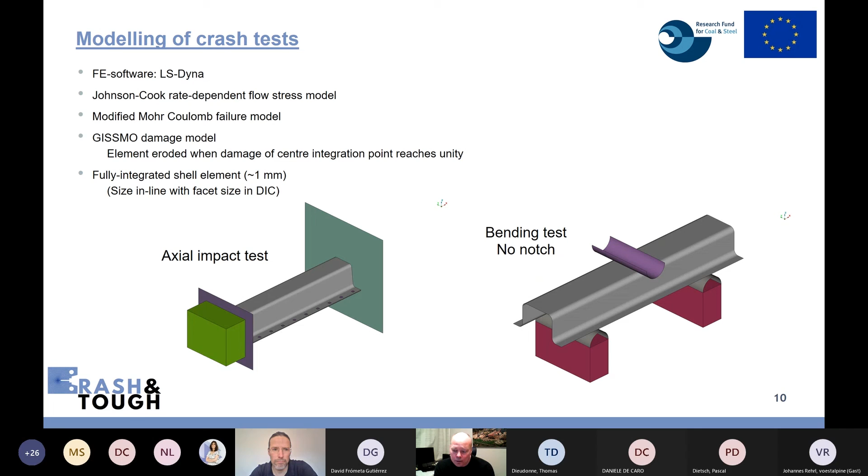This size is correlated to the size of the facets in the DIC for the stepwise modeling method, so we detect the fracture strain with the same size as these shell elements.

In Crash&Tough, you can also see an example here for HF1180 CFB, and you can see there are some underestimations. The calculated simulation is the black line and the blue one is from the experiments.

And another one, this is from LTU. You can see the measured strain to the left, and the video to the right is the corresponding model, and it looks quite similar, but the thing is, unfortunately, you lose the correlation when the crash box is too deformed.

This is one image from this crash box test, and maybe you could see some cracks occur. You can see the motivation for why we are underestimating the properties, because if you look at these other two images from the simulation, you can see we have a crack, but that doesn't occur in reality. So that's the reason we underestimate the properties.

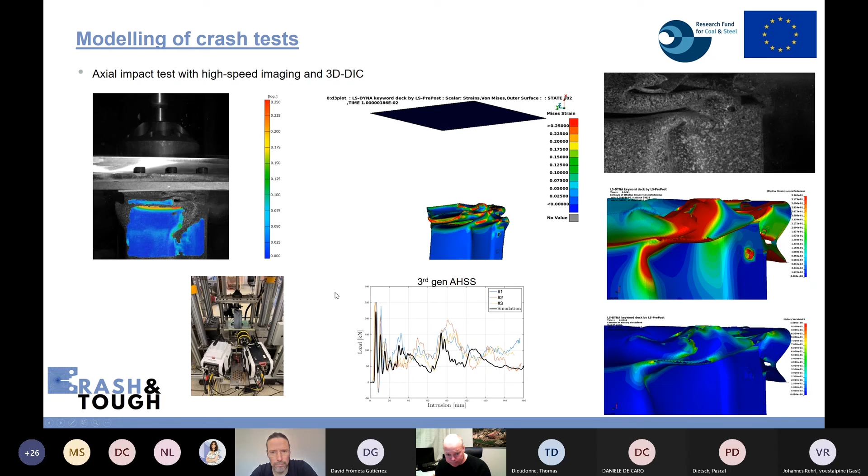On the other hand, if we have bending resistance tests without any notch, we are more or less spot on if you compare the measured with the computed. But on the other hand, we don't have any failure here, so you can't validate the failure mode criteria used. What you can say is that maybe the flow stress model we obtained is good enough, but once again, we need some kind of failure.

So therefore, I will let Ricardo conclude this presentation.

As you can see in the previous presentation, the crashworthiness of this third generation advanced steel is excellent, and we never found cracks in the bending crash test using the standard specimen. For this reason, in order to investigate the failure simulation model, we introduced two big notches at the middle bottom part of the specimen. With these two notches, we were able to induce cracks and obtain full material failure in this area.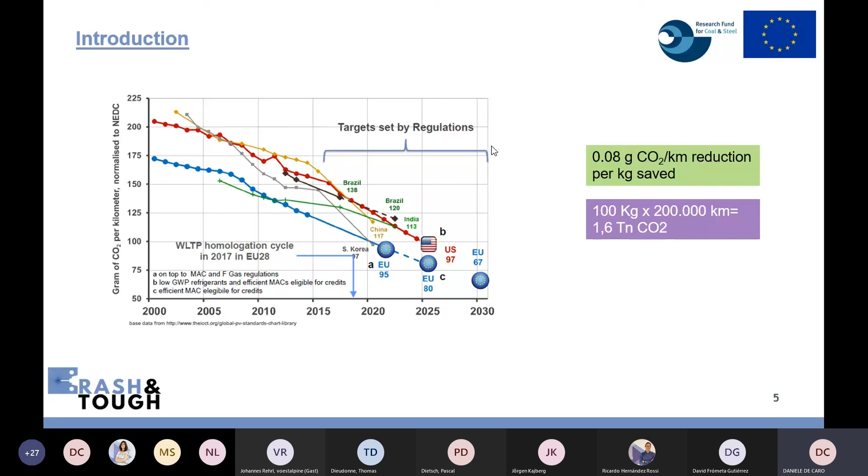Consider that for every kilo you can save on your car, you can reduce CO2 emissions by 0.08 grams per kilometer. But weight reduction will also play a really big role for future electrical vehicles.

The current scenario shows that on the market today, electrical vehicles have a weight higher than their internal combustion engine counterparts due to the battery pack. Because you have to assure the customer can drive enough kilometers, the increase in weight ranges from 200 to 500 kilos per car. Adding the necessary weight due to the battery pack is a problem because increasing the weight of your vehicle increases the mass, and this means more inertia. So it means you need something more to achieve the same safety target you had for internal combustion engines, and moreover, you need to protect your battery pack.

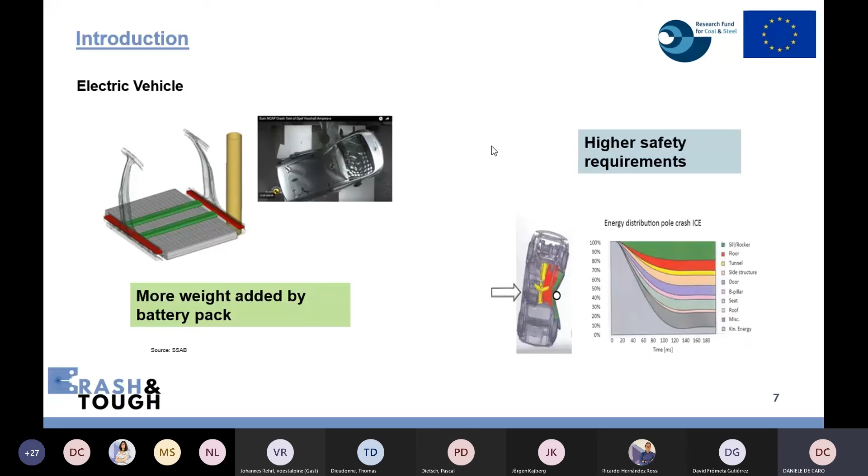So one of the options is to reduce the weight of the vehicle and increase the strength of your components. And last but not least, the second behavior affected by weight is the range you can drive your car. It's clear that if you add mass to your car, you have to use more energy and you will drive fewer kilometers. So one way is to reduce the weight of your vehicle to drive more.

So currently, one of the most appealing materials on the market is third generation steel, which has been well described by my colleagues before. The reason is that it has high strength, like and more than first generation steel, but also higher formability than lower steel grades of first generation. This means you can reduce the thickness of your component while maintaining the same overall strength of the part.

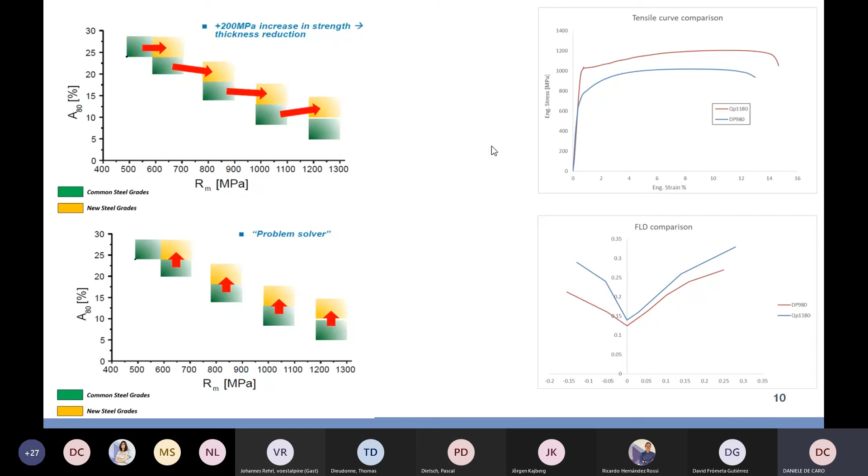Reducing weight and reducing also the usage of material in the vehicle is also important for sustainability.

These properties, as described before, are achieved by a perfect mix of different steel phase microstructures like bainite, martensite, ferrite, retained austenite. There are already some winning applications on the market, like in the Alfa Romeo Giulia Stelvio,

where Trip Bainitic 1000 has been applied for the first time in the underseat beam. This is one slide presented by Eurocar Body Engineering, and the meaning is that we already apply it and we are able to save weight in the vehicle.

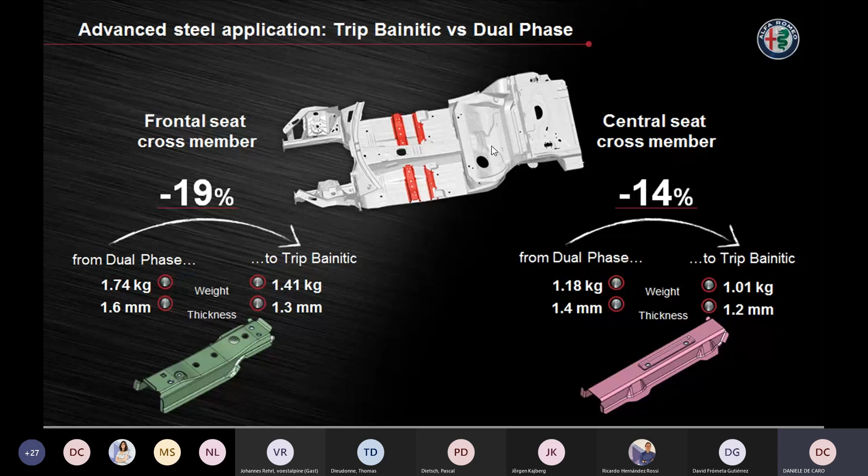But this is not enough, because still the volume of third generation steel in the vehicle across the world is too low. For this reason, in my opinion, this project was very important to increase our knowledge about third generation steel.

Going straight to the activities about the implementation of these materials in a real industrial component, together with the partners we chose two different parts, because we had different material thickness availability for the project for the different grades.

The goal of this work package was to understand if with these new materials, increasing the strength of the material we are using, the component is feasible, so assess the formability in real parts, and understand which can be the lightweight potential for future applications in new vehicles.

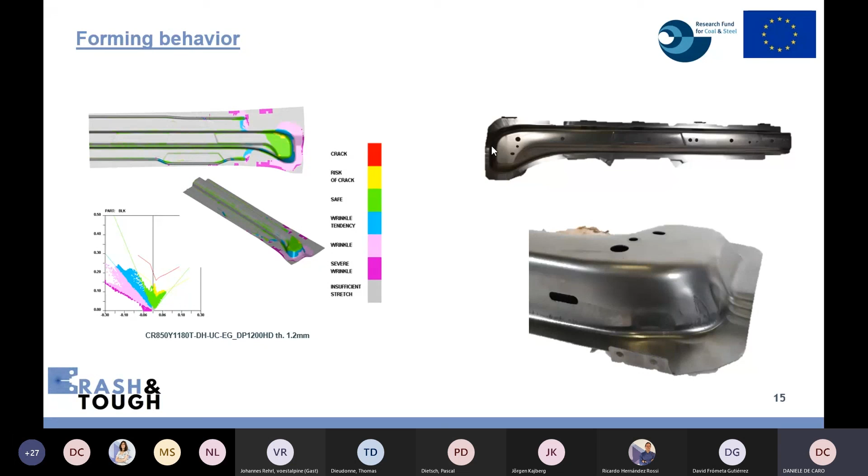Otherwise, looking at the battery pack reinforcement, the forming simulation for both of the components showed us that in some critical areas, some cracks can occur at the end of the stamping test.

Nevertheless, the experimental results show something different. In every component we were able to stamp, no cracks were revealed, so the component was okay and feasible with the highest strength grade 1180. And obviously also in this case there are some defects.

This tells us that the standard method we use to characterize the material and to perform simulation, also in forming, is too conservative, and so we need something more to better explore the failure mode of these materials, like well explained by my partners in the previous section.

And here I can show also that on dual phase 1000, the first steel generation, the formability is effectively lower than the 1180 high formable grade, and some cracks occur on some components due to critical areas with high strain.

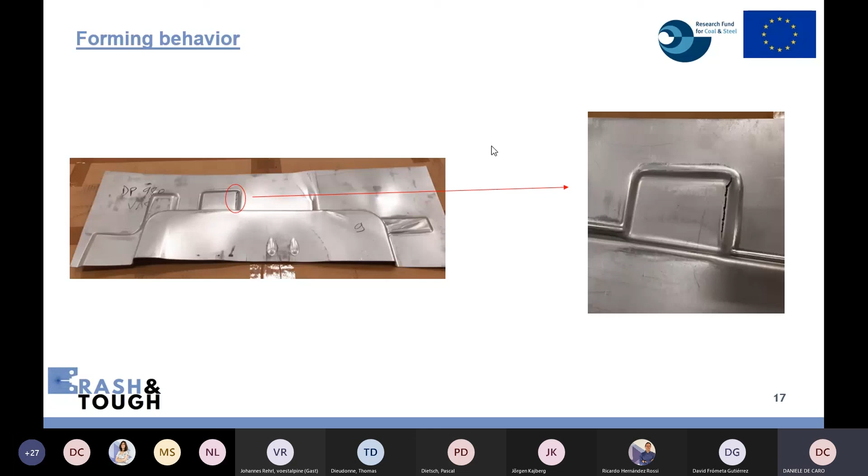Moreover, on all the materials we performed high strain rate tensile tests using the Hopkinson bar based in our laboratory in Turin at CRF. These are quite common tests that we perform to assess the crashworthiness behavior of the material at sample level.

This data has been used as input by our partners for high strain rate simulation. The results show that the ultimate tensile strength of the material generally slightly increases with strain rate, meaning that the material can sustain more energy during a crash event. That is good news.

So about the future scenario, from our research, I can say that the world is going in this direction. In our opinion, the volume of third generation steel in future vehicles will increase from today's 5% up to 12%, up to 20%, because as I said before, lightweighting is going to be more and more important.

I see three potential opportunities for the spread of this steel. One is to substitute, as we have seen in the project, the first steel generation, reducing the weight also of the component.

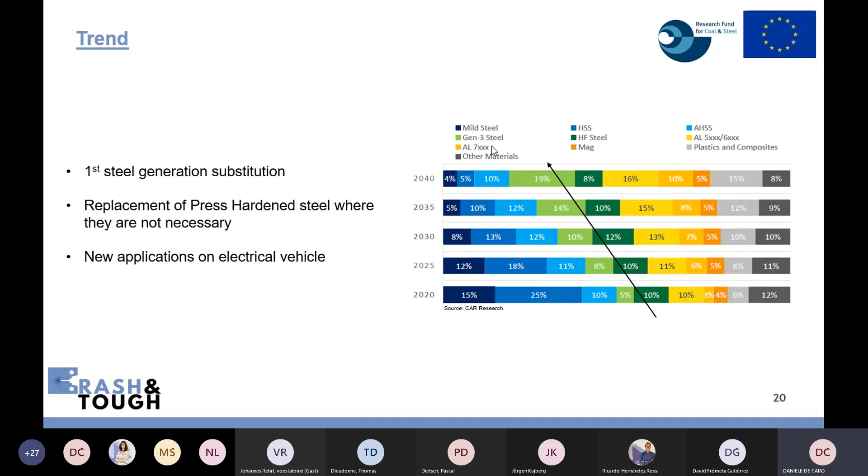And there can be new applications on electrical vehicles, especially on new components like the battery tray, where currently it's dominated by aluminum. But we are seeing that some new concepts in steel are arising, and there are a lot of projects to study new concepts in steel. For sure, third steel generation can play a big role.

So going to the conclusion, the main achievement of this project, in my opinion, was that we were able to have a fruitful and useful collaboration with a lot of strategic partners, exploring the full potential of third steel generation and their failure behavior in different conditions. We were able to assess the formability and so the potential application of this steel in real components,

substituting dual phase 800 mainly. And we were able to increase our knowledge about the failure behavior of this steel. There are still a lot of challenges.

So for sure, first of all, we have to open our mind inside car makers, so inside the automotive industry, in order to use and replace the standard material model that we use to model the failure of the steel, using the new ones that are arising like in this project in Crash&Tough, because only in this way we can be able to catch the real behavior of the material and unlock a new lightweight potential for the new vehicles.

Then in my opinion, we have to go further with welding evaluation of third steel generation. We know that there can be some problems, so we need to work all together, all the stakeholders together, in order to understand better this behavior.

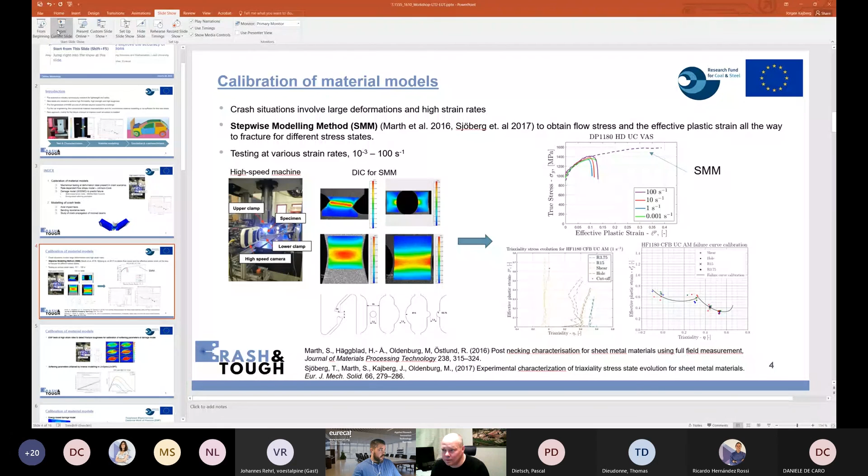I'm trying to share my presentation here. Maybe it's easy to address the question this way. Is it that one? Sharing is paused. Do you think I could share mine? Are you sharing? I'm trying. Let's see if... yeah, now we can see. It's easier to... so I go from... so is this the one? Is this the one, David?

Also, one other related question, maybe Pascal can help us here, because I know in the project we haven't looked at it, so I guess the answer is no, but have you evaluated somehow, maybe in other projects, since you mentioned the fracture strain in plane strain is one of the most important when talking about this failure behavior during crash - have you evaluated the influence of strain rate on this fracture strain in plane strain?